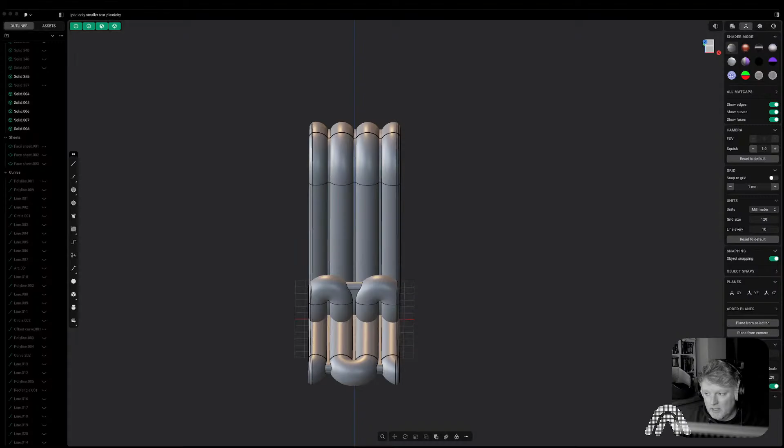So howdy folks, let's have a little look at what we did yesterday, Tuesday, because we designed an iPad stand, which you'll notice is quite different to what we actually designed. Well, not totally different - I made some modifications because ultimately the tests were fine. It actually came out pretty good. It was bigger than I thought it was going to be, but I think I actually quite like it.

My idea about putting a slice through the middle just to connect all these pipes together had to be done, but I've made it a lot thicker. If you imagine when it's printing on this side here, if there isn't this straight surface, there's actually quite a strong overhang on this curve. So I just made the slice that goes right through the middle much thicker, so now you have these flat surfaces, which mean it prints at a better angle.

Rather than the overhang - imagine this curve continued all the way to here, which is where it did go - you've now got much less of an overhang. So this version is actually printing at the moment. I think it'll be fine.

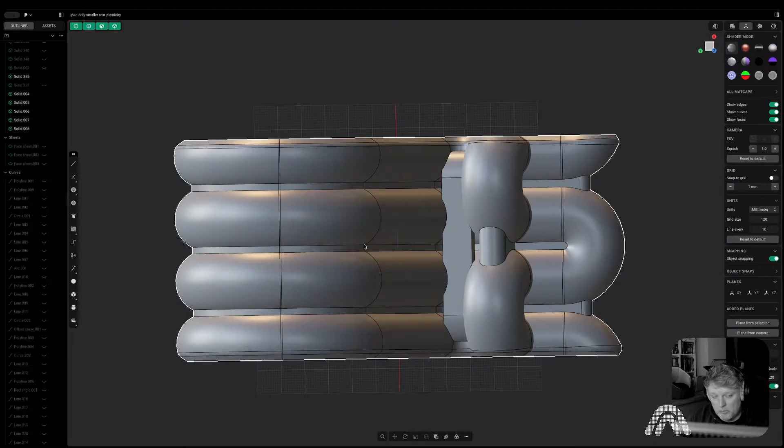I made it much narrower. It didn't need to be as wide as it was. But let's actually just have a little look at the...

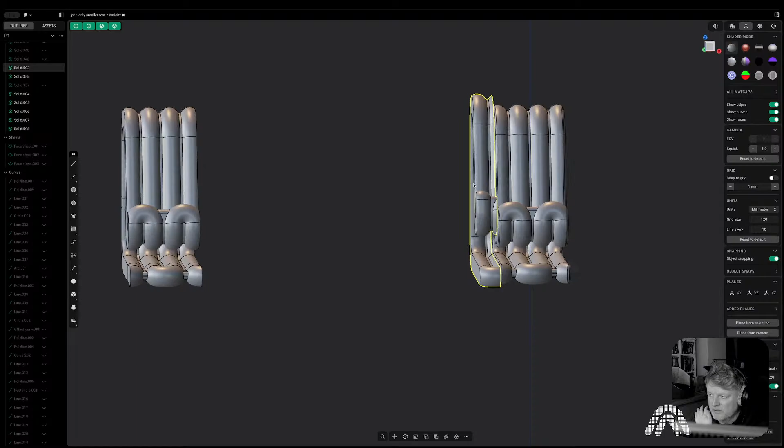I mean, say for example there was the additional width it was on, and the height - so it's quite a bit smaller. But it definitely is not needed.

Especially considering I'm using it on a 13-inch iPad Pro, so if you think about putting a normal iPad on, which is a bit smaller again, and then even if people put an iPad mini on, it would look even more ridiculous.

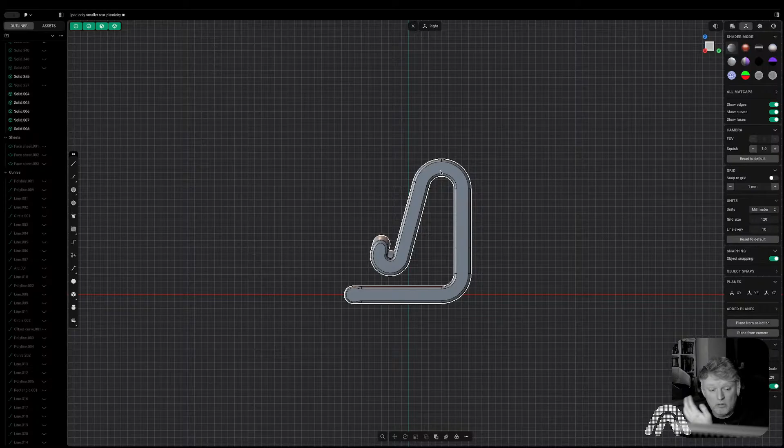It just looks totally not imbalanced physically, but it looks imbalanced as a design. I think really the ideal thing would be if you were to have - obviously the whole product has this 15-degree angle, which is what the iPad sits at and what everything's tied to effectively. I think the ideal place for that front to finish would be if we were to take that.

Just say for the sake of argument, that's 15 degrees.

I think really the front of this could end in there, just to give it a much better aspect, like several of those 15-degree lines which make the design. To be fair, that'd be really easy to do. Simple as just putting that in and then bringing it back. It's 2 parts there because I've halved it. But I might try that and give it a test, just see what I think.

But for today, now this is a weird idea. It's not weird, it's a lamp. I want to design a lamp today, which is something I do a lot.

And the bit that, when I say it's weird, the bit I think is weird is I find heat sinks very, like heat sinks on CPUs and any sort of cooling heat sink, I find them very aesthetically pleasing. I find them dense because there's obviously a lot of surface material in them, surface area, sorry. I think that heavily finned design I always really, really like. I've actually designed some bowls in the past which have been inspired by heat sinks.

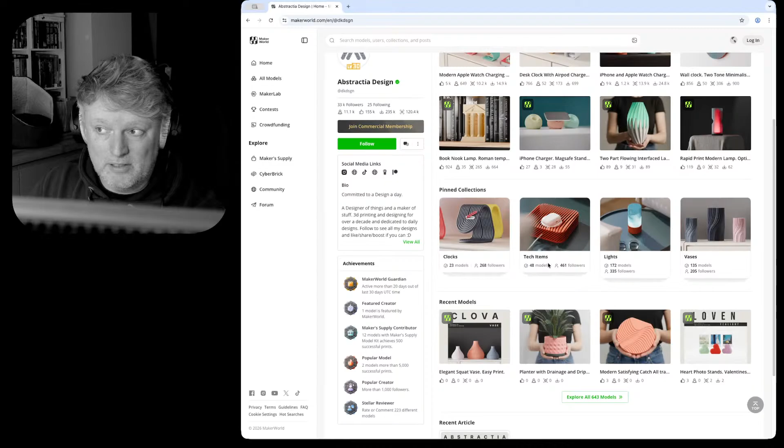I think, well, actually, you know what, let's have a little look at that bowl I'm talking about, because it's interesting. Now finding it might be another thing, because I did just notice today, I actually think I've got to... I don't know why it only says 640, oh, because some are hidden, because I've not uploaded them yet, well, I've not made them live yet. Do I have? I don't think I do. Let me just go to all my models and search by bowl.

I've never actually tried MakerWorld's search feature. Yeah, bowl, not bowls, bowl. Try heatsink. I don't know how anybody else is meant to find it if I can't find it. I'm 99% sure that I actually did call it bowl. But no, I'll have to find it later.

But yeah, I've always liked the heatsink kind of aesthetic. Which sounds like a bizarre sentence to say, a heatsink aesthetic, but I designed this lamp here. And I think the heatsink that this made me think of, which being a lamp is especially relevant, is...

You know, you get those when you used to have halogen lights, which you would have in your bathroom or something like that, and now they're banned. So now we have these LED ones, and quite often on the back of the LED ones they have these crazy heat sinks, and I assume the halogen ones did too, because obviously they were hotter.

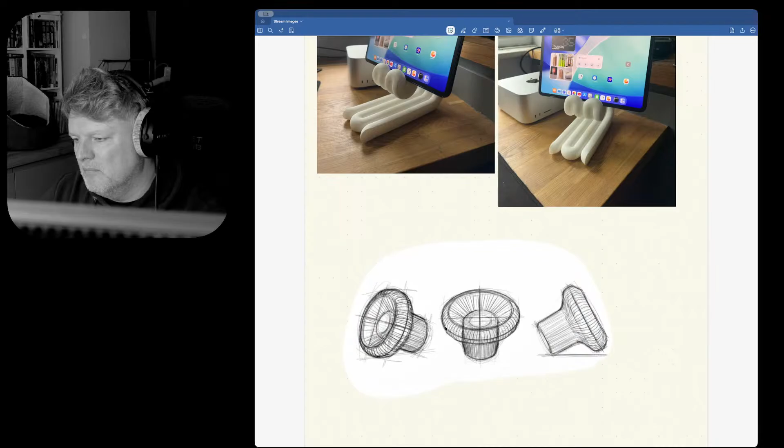And that was kind of what I was thinking of here. So if you imagine this line here was cut off and that this was the front of an LED light which goes in your ceiling, all this being fins, each of these being radial fins. And then in here having the LED mounted.

Now, what I'm not fully decided on yet is what I would want to do for the diffusion. Would I want fins for that, or would I just want something that dropped in, or would I actually just want it open like this so it shows all the fins, and then a small diffuser goes over here on the cap? I think that probably would be what I would want to do, because it would show off the fins more.

And then this is how I want the lamp to stand. It's not going to be a vertical lamp, it's going to rest on its side like this, so the cable would come out of this area here. Now, hopefully with the fins, I won't have to put any little legs on to stop it rolling, but if I do, it's not a massive problem. You could put little legs on, or actually just print a little tiny V-shaped stand, which would then just slot into the fins. So I think that's what I want to do today.

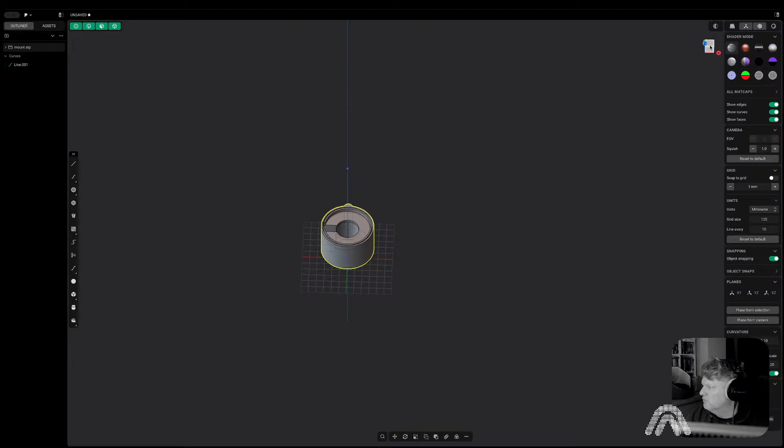So, mount - whereas this, straight to the point, mount. Now, a really annoying thing about this mount is because I have this little arc which is used to key it to lampshades when they sit on top, so I know the pattern on the lampshade matches the pattern on the base - some big brain galaxy thinking there.

But the problem is I've done this a few times and not realised, so this is a little top tip for you. You look at this, it's been imported, it's on the centre. You think when you're going to rotate it, it's central, but it's not, because by default when you go to rotate, it takes the centre of mass, not the arbitrary centre you think it should be as a human being, surprisingly. You can see, because there's extra volume here, the centre point's actually off.

So if you go to rotate it 90 degrees, all of a sudden it's no longer centred. A few times I've designed stuff and not noticed that. And the thing is, when I've gone and done the lampshade, everything fits because obviously everything's designed together, but I'm like, why is the LED not in the middle?

And that's been why. So the first thing I do when I bring in this mount is I set the pivot point with V to the centre of where it's imported. I do find it odd that it imports central - it must have just been in that position when I saved it as an STP file. It's odd to me that it knows to put it centrally on import, but then not. But these are the mysteries. Tip: if you've got something that you think isn't fully symmetrical, just double-check your pivot point when you are centering.

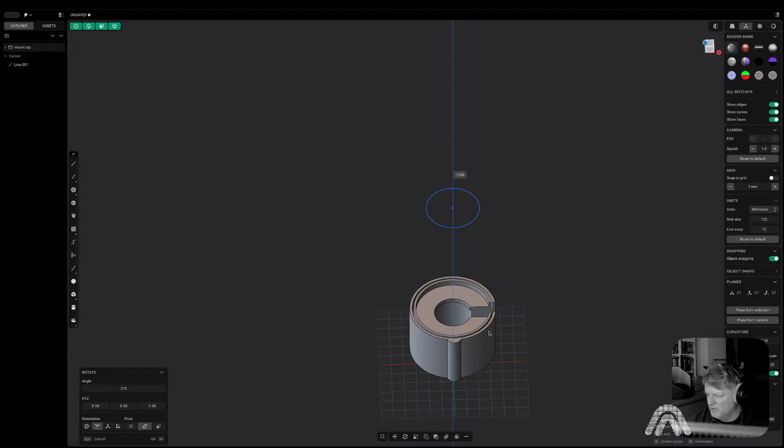So I think I'm going to design this top down. I don't know why, I just think my brain prefers thinking of things vertically when I'm designing them, even though this is going to actually lie horizontally - well, kind of horizontally.

Right, so I'm not even really going to use that right now, but the reason I brought that in is it gives you a good idea of scale. Now, another thing is I'm just going to add in a circle that is 240 wide. That's not necessarily full size, I mean I think we will need that full size - that's just so I know what size I don't want to go over for the build plate.

Because again, if you design it too big and then you have to shrink it down, you get into that thin fins problem. So I'm going to go with 240 wide. Now, ideally 180, because then it would fit in the A1 Mini, but I just think this item is going to need to be bigger to have the impact you want it to have.

I could make a smaller version if it's a popular design - in fact, we'll see what it looks like when it's done. I think initially let's just go for a 25mm straight edge here.

What I'm going to do is just design the profile, make it into a fin, and then radial array the fin. But this is always a bit that I think just needs lots of finagling. Oh hurt, didn't expect to be saying finagling today.

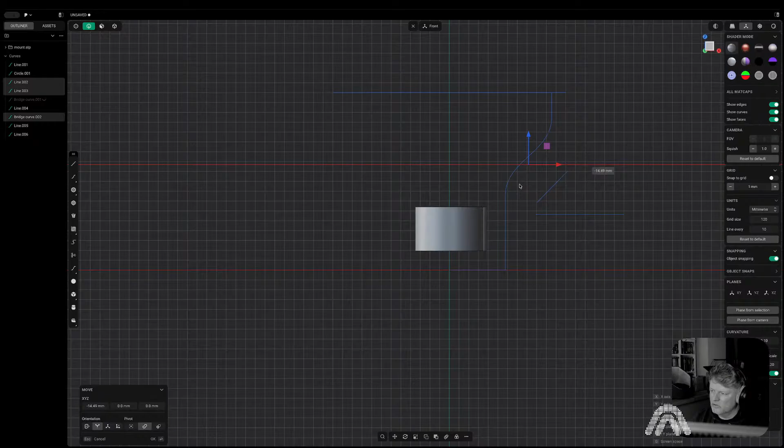Now the light's not going to go here, the light's going to be further up.

First stream sneeze. Achievement unlocked. Right. I hope you all said bless you, otherwise I'll be smited by Satan for the rest of my days.

So let's make this into a fin. Now 3.6, and I've pressed tab to do it both directions. Let's try 2mm, so that'll make a 4mm fin. What do I think about that as a thin fin?

I think the easiest way to know whether I like it is just to radial it, and we'll just see how we feel.

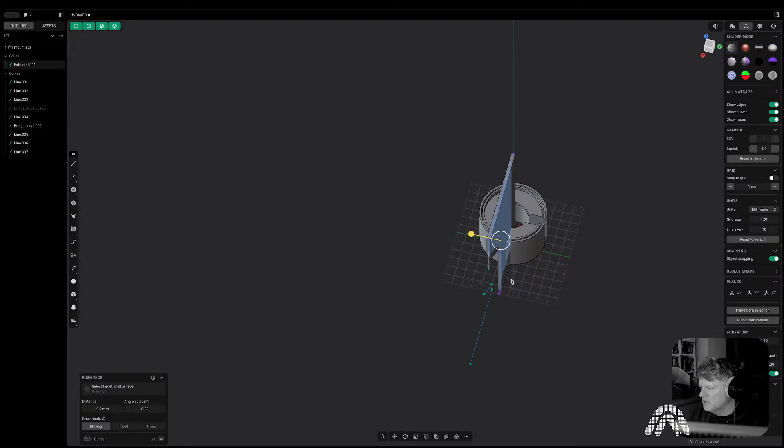I feel that looks a little thick, but it could also be that there's not a fillet on the edge. Just what I'm going to do is I'm going to take half a mil off. Sounds like nothing, but both sides it's a mil.

And before doing the radial array, I'll add a fillet because otherwise I'll have to do it 300 times.

Now, let's have a little look at what we think of this as an array.

Now, how many do I want? Now, I want it to be an even number. Quite like that. Let's go with that.

So that was 50, because I can guarantee you in about 15 seconds I'm going to say I need to change the fin and I'll delete them all. So remember, stream, remember 50.

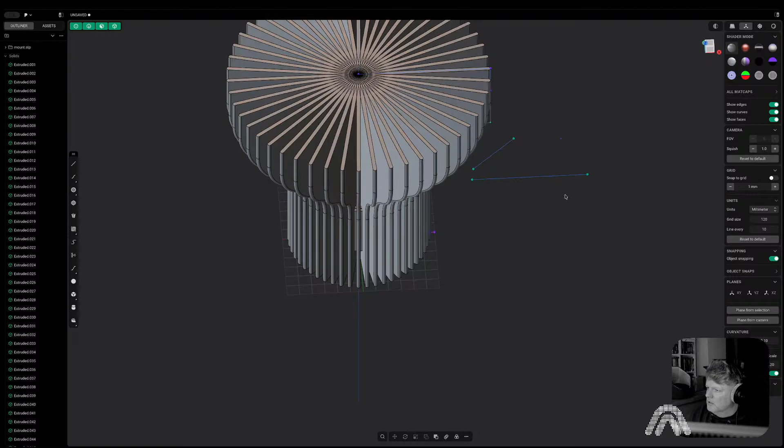So what volume do I want? Yeah, so I'm actually going to delete these fins. Let's delete all those fins, because what we could do with is figuring and just getting this internal shape here sorted.

So what I'm going to do is I'm just going to take those curves we did, join them, offset them, might offset them a bit more.

So what I'm being careful about here is I don't want to make these two smaller fins as well, like in actual center to circumference of the circle that they're making up.

Because I will have to put braces as they go up, because tall thin bits as they print start doing this. And I don't know if you can tell, but it's not ideal for 3D printing this sort of motion.

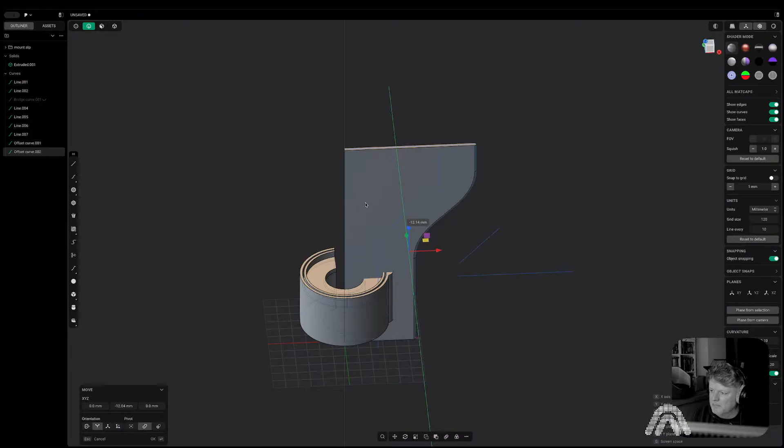So yeah, I'm gonna have to make them rigid to each other. And the best way to do that is just effectively add some bracing inside.

Let's just bring this up to where I think I'd want it. I'd probably want it about here. Now, obviously, what I'm going to do is I'm going to integrate it into the fins.

I think what I'll then do is I will put a line here.

Let's turn off X-ray now. I absolutely hate X-ray and I don't know why. I think it's just busy.

Right, well, that was precisely not what I wanted. So let's just get all of these. Scale Z, scale Y, because on Y, not Z. And then let's grab on the Y and bring them to this line.

Yeah, and then that gives us a solid. And basically, I just wanted to make a little bit more at the top here.

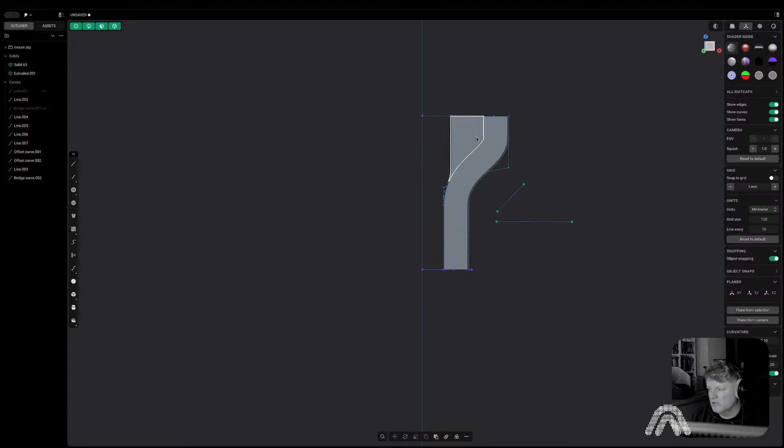Which I'm not going to include right now. I'm just going to hide that just to see how I feel about it when it looks revolved. Not revolved. A rotated array. A radial array, sorry.

Yeah, I like it. So are these contacting in any place? They're not, which is good. That's good. But what I'm going to do is I'm going to add in a circle here.

Going to come all the way out to here. I'm just going to pull this up a few mil. What did we say the other one? It was 4 in the end, wasn't it? So we'll do 4.

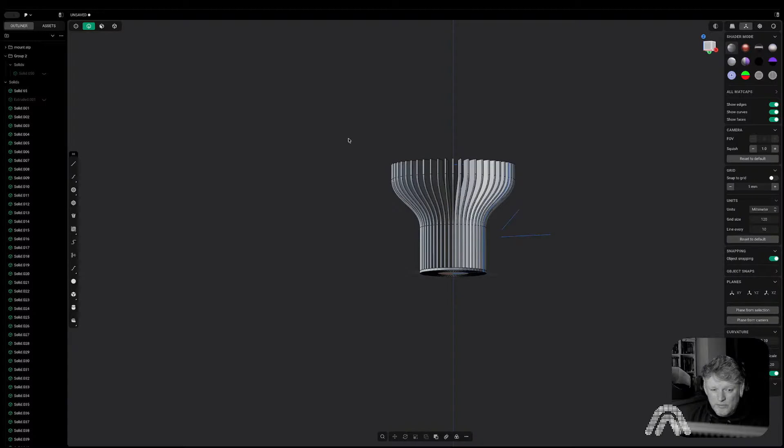Right, let me get that first fin. I'm going to duplicate it and put it in a group, just so if I decide I want to do something different with them, I've got the original fin.

And then add all these curves. So that would be the basic gist of it. Now I'm gonna have to put at least another 2 braces in.

So I think I'll put one there and possibly one here. This one should actually just be the same as the one I did before, so I can just use this same circle. So if we go up.

Now, in an ideal world, I wouldn't have to add these because I think they do detract a little bit from the aesthetic, but can't do anything about it. It won't. It just won't print.

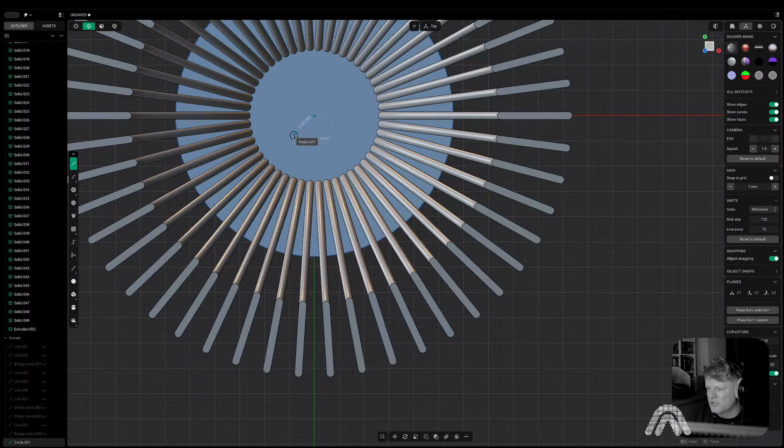What I could have done is a couple more fins, and then they would have actually contacted slightly, so then this would have been a solid surface. But I quite like the idea of these tiny little gaps.

So I'm just going to keep it this way. I'll just do another circle in here that comes to there. Yeah, so now I've got a donut rather than a ring like I have at the bottom.

Just checking everything's working still, because I'm getting some weirdly dropped frames today. I think it's our internet's on a bit of a jank today.

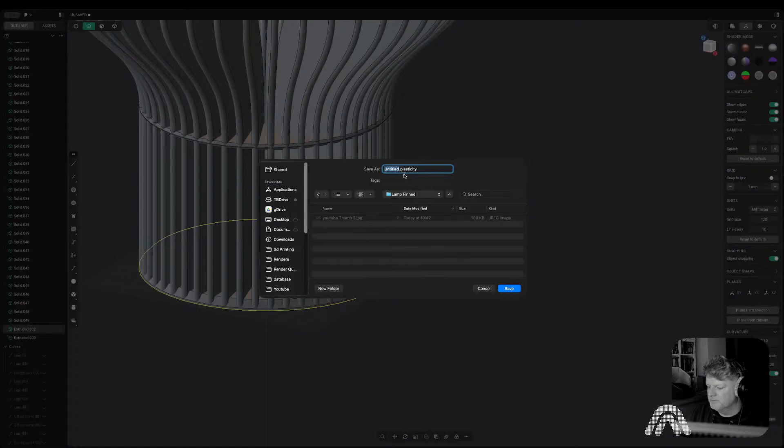Let's save this. Lamp finned. Lamp finned.

So let me have a little look at my sketch again. So I think what we want is the mount to be... let's put a sectional analysis on so we can see clearly. I think we probably want the mount about here.

And if I put it about there, then it's recessed in enough. And what I'm thinking is I could chop across here like that and chop those bits off at the top there.

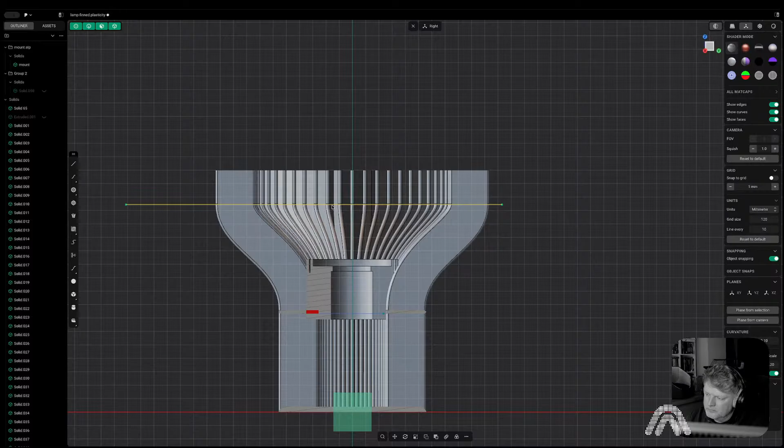Now, not necessarily to get rid of them, but what I'm thinking is I could then print a separate part that acted as like a top. I don't really know if I want to do that or not. I think a cooler idea would be... first of all, do I actually like that extra bit at the top?

What I'm going to do is I'm just going to actually do the cut. I always say this, but sometimes you just have to do things literally just to delete the idea from your head.

Well, I do anyway, because I just let ideas run away with me. So this might look bad, but it doesn't really matter, does it? We just press undo. So let's just hide those for a second.

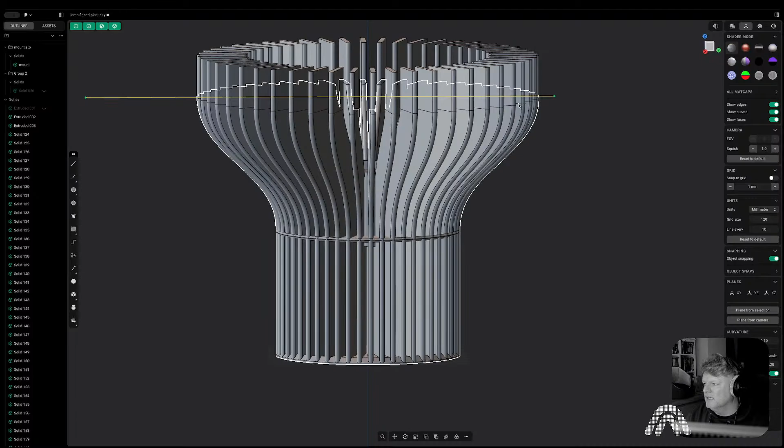Yeah, so straight away, no, it's better with them on. But I think what it is, I don't like the angle of them. So, you know what? Rather than deleting them, I'm going to delete all but one.

And then we can maybe have a little look to see what we think about doing with this shape. So what I think would be better... this is why I'm going to wish I didn't have fillets.

Everybody always says do fillets last. Do fillets last. Don't do fillets until the very last thing. Do I listen? No. So...

I'm trying to think about what sort of form I want this. So essentially what I don't like is this super flat top and this box. It just looks like exactly what it is, which is a square stuck on the top. So...

Should I try a circle? Just thinking of shapes. Like cut like that. Let me have a look at my... Ah, right.

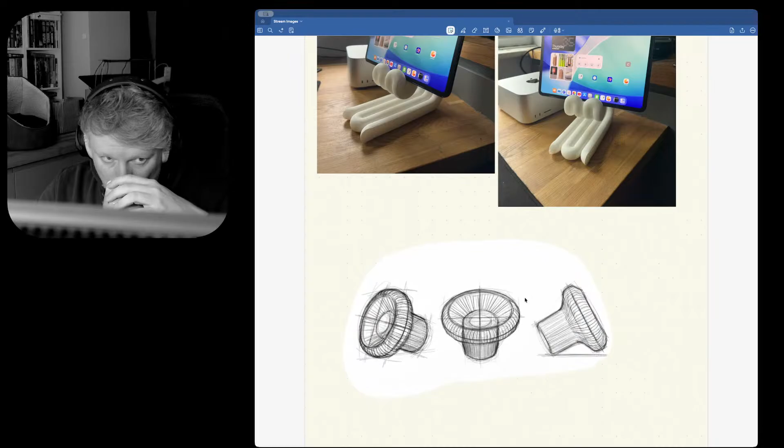Right, so what I did when I do this is curve on the outside straight down to where the light is on the inside, which I remember seeing on the examples I looked at for lights. So, right, let's just take that straight edge here as it's fine.

But what we want is to effectively fillet off this, and then we can use... probably we could go half the height actually, probably chop this in half.

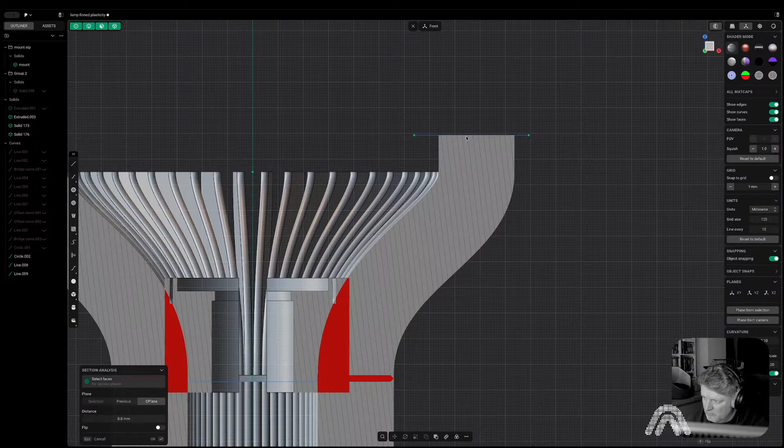So let me get a section analysis on so it's easier to see. I'm thinking if we fillet this off so it's curved, maybe about there, and then we make a straight section of the fin here so it's not the same on the inside as the outside.

This is one of those things that looks right on the sketch, but then I'm not convinced it's the right approach. So I'm just going to do an ISO on there so I can steal this line, so I've got something to bridge from. So if I was to do like this.

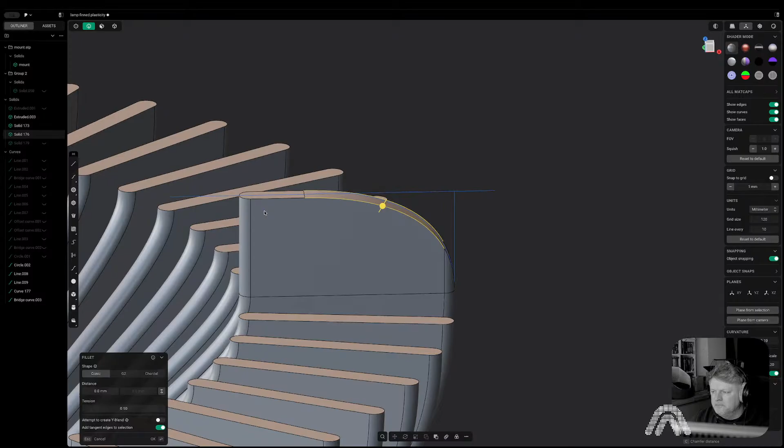I want that on the inside. I think I do prefer that. I definitely prefer that. Let's just do the array and see what we think when there's lots of them. Yeah, I definitely prefer it, but I think I do need to do something about this fillet.

Don't add tangent edges. Yeah, that's what I want. Let's get rid of these curves. .5. Yeah. Now, am I actually happy with this internal here, or do I want... Let me just put a line in here.

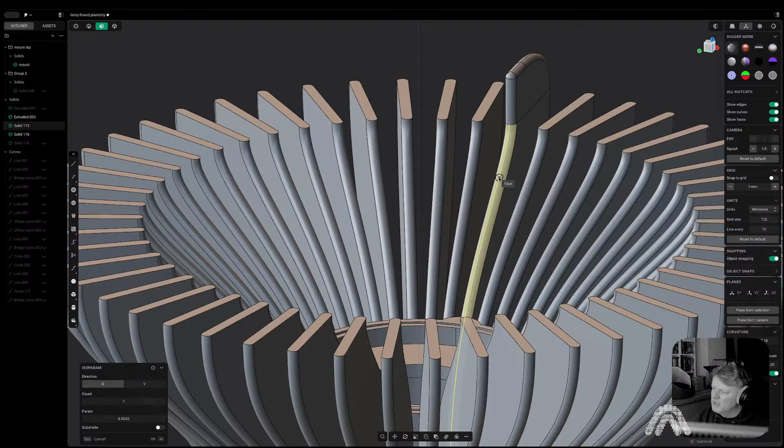So what I'm thinking is, I still don't like this bit here. So if I was to put a line like that to give us this angle, let's just try and bridge in a curve there to see what sort of stuff we get.

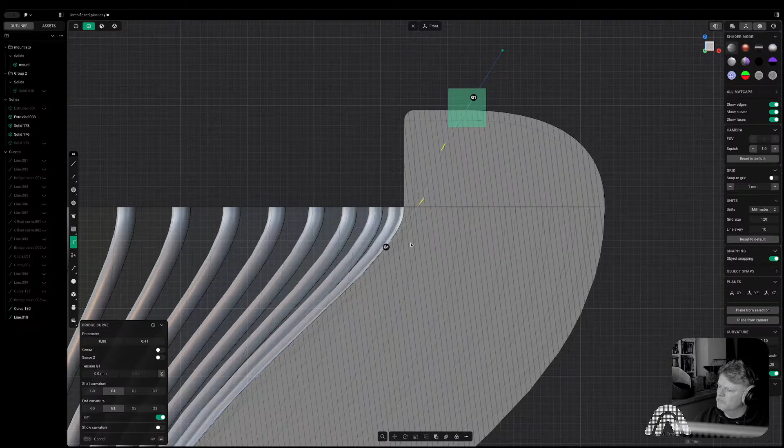Think about this, I don't want it that far. I want it to chop. Obviously we'd have to cut this as well. I don't know what I think.

It's definitely better than the straight. So let's just get that line back again. This here, and then cut. Yeah, we're not going to be able to, are we? Do this though.

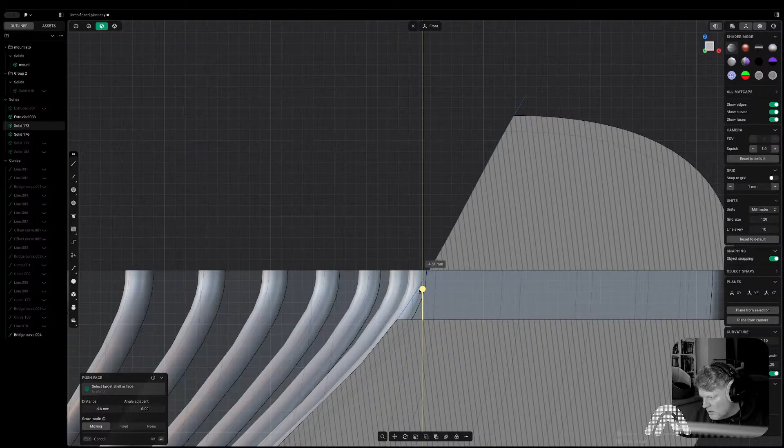So effectively what's done there is it pulled it, and because it's smart and it knows the curves that it's running, it effectively just goes with the angle of the curve that's on its face, which is this here.

So can we... Yeah. 1.5, was it? Yeah. So now will these meet? I don't think they will. I think ultimately...

Oh, they do meet. Nah, not right though, not perfect. Yeah, not at the back. I think the better way to do this might be actually to just hide this.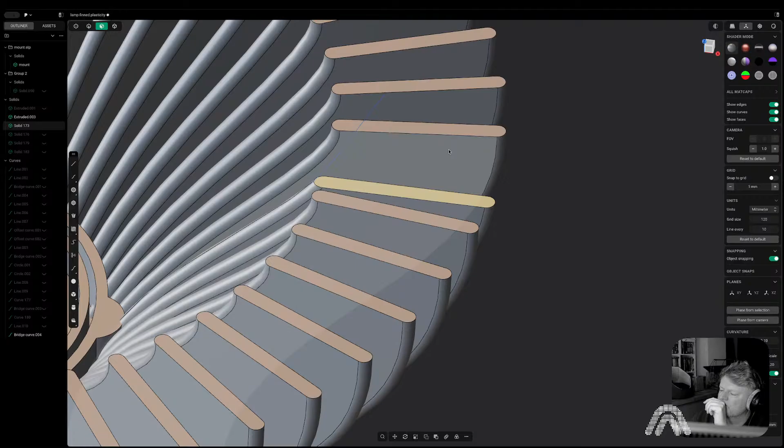And make it like a surface model, but I'm not sure if this will work. So all I'm really doing here is making a smaller version of the same geometry. Oh, it's not joined, that's right.

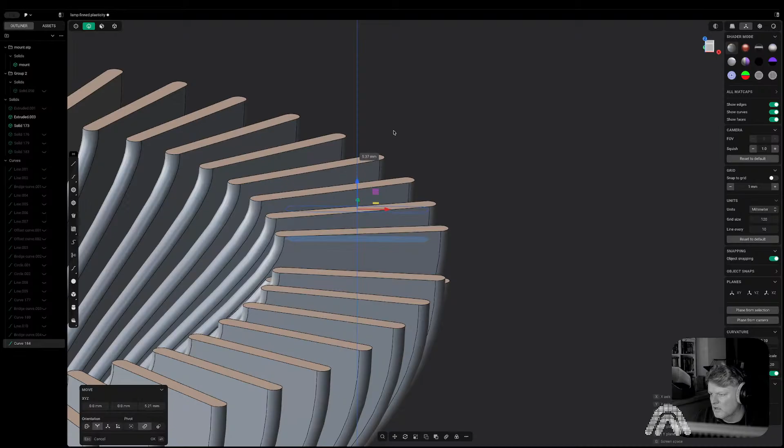Just thinking of making a smaller version of the geometry that we can then loft into and just see what it looks like. So if we get rid of this surface here, so this is now a sheet. Let's add a surface so the tangency's got something to calculate off. Right. Yeah, we need G1.

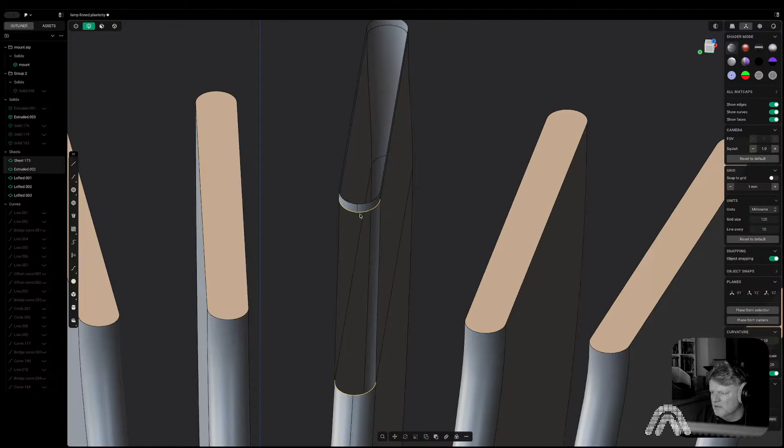Let's get on these here. Got a bit of a funny kink in there, haven't we? I think it's that middle line. Can I get rid of them? I don't think I can, because I think that's effectively where the fillet meets in the middle. Yeah.

I'm not sure it's any better than what... I mean, I would chop the top off and then make it a dome across there, but let's just try one more time with it. Let's just actually try purely.

Let's bridge those curves and see if we give it a guide, whether it's any better. Yeah, I think it is, isn't it?

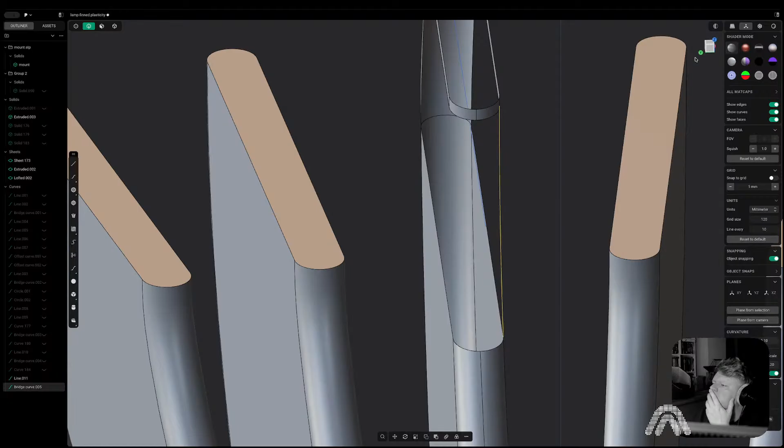Yeah, let's try this then. I might as well bridge this as well, just to give it another guide. I think I'll leave those G1. So now at least this way, this surface here has got, it's like fully defined, it's got surfaces to connect to everywhere.

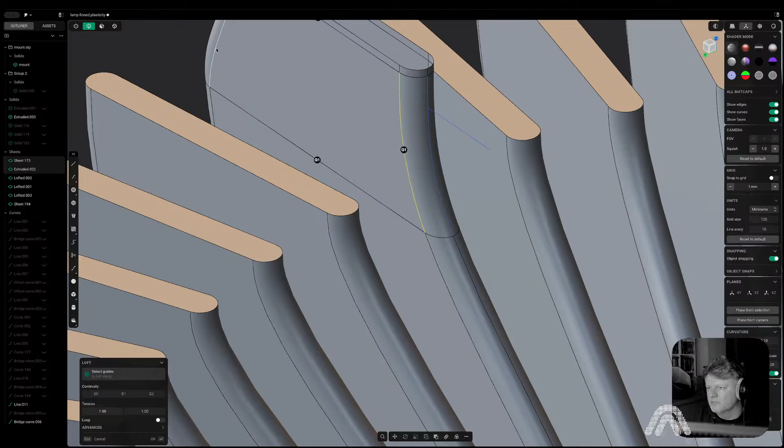Just making you dizzy because it made me dizzy. I don't know why.

Right, well these join. For some reason I don't feel like these are going to join. They joined. And they joined to the main body. So let's just get rid of this bit again.

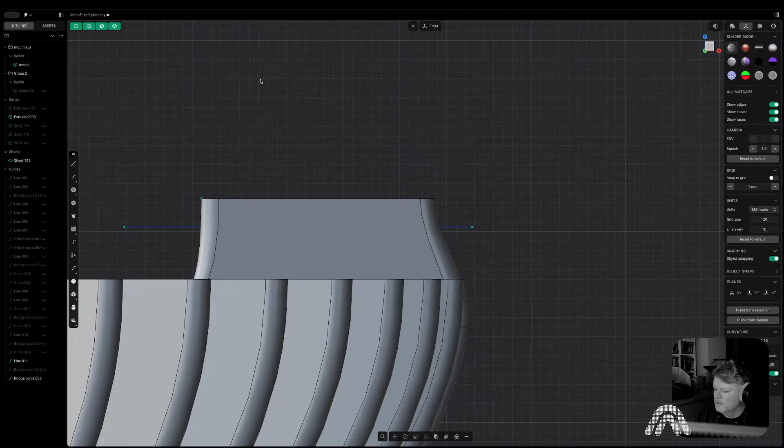Now I'm going to take this line here and bridge it to this one. There is not one there, because you need to add it. So bridge from here to here.

Now, this is going to be a cut line. My thoughts are, if I find an angle or a line that I quite like... oh, this is a bad idea. Yeah, it's a bad idea. Just out of interest, if we loft that to there.

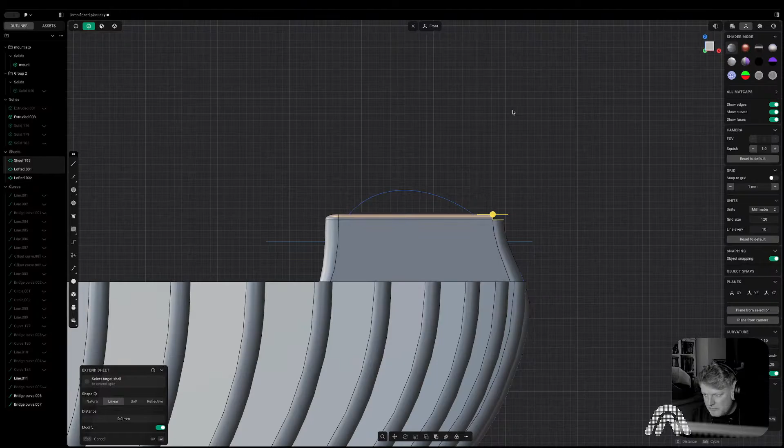I don't think I like this. Do you know what I think it is? I think it takes away from that heatsink look. It's more, I think it's a bit better when it's straight. Yeah, I think I'm going to get rid of this.

You know what? This is just me experimenting now, because I can get this model in 5 minutes, but I'm kind of interested about what this is going to do.

Let's bring that to the end and that to the end.

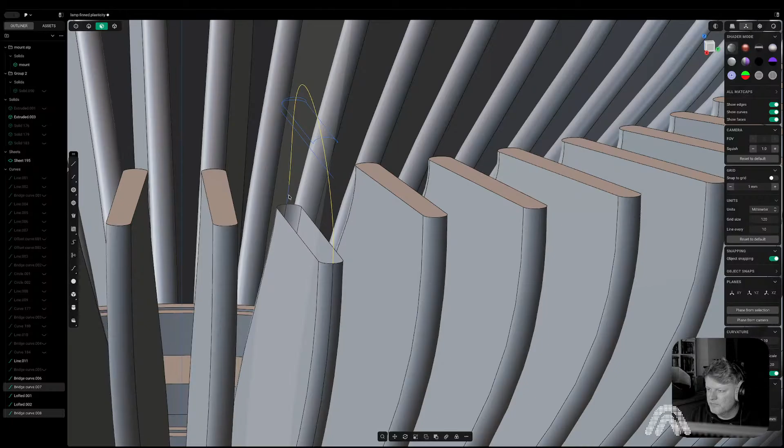So I think I've got X, yeah, so I've got the studio edition, so I've got X NURBS. So this is not going to work. But I never use X NURBS, and X NURBS is basically like a really advanced thing for surfacing. I was just wondering if I could give it that guide and it would figure out what I meant. It doesn't, but I think you could probably loft.

If you could do this. No, you couldn't, it's too aggressive. Yeah, intersects that way.

Where's that bit I cut off?

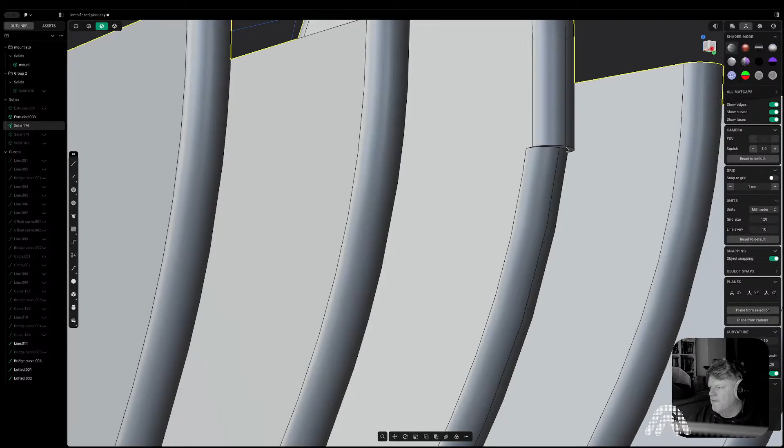Sometimes the simplest solution is just the best one.

Right, so rather than have to redo every fin, let's just cut this top off and radial it. Because I think all the rest will be the same, or will they not be because I made that change? No, they're not. Right, we'll have to do the fin then. That's not really a problem, is it?

Hide this. So what's the best way to do this?

So if we treat that as the middle of the fin and we radial array, it's still on 50. So if we change it to 100, yeah, now we've got the ability to cut this, and then this.

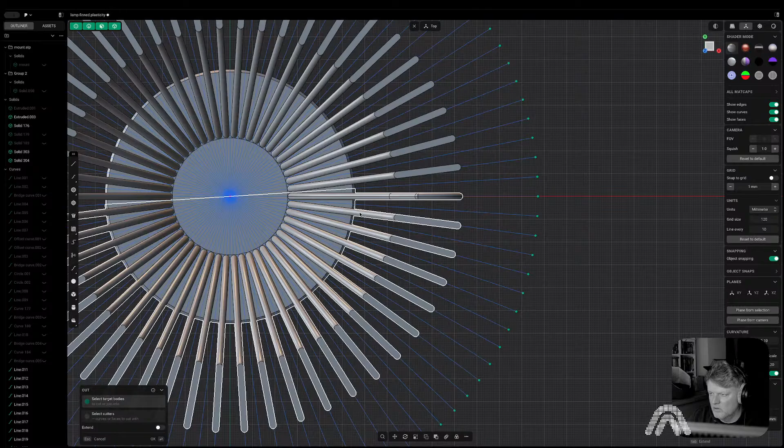And then all of this can be hidden. And then I believe we can just do this 50 and we'll be back to where we started. 100 looks cool and all, doesn't it?

Oh wow, I should not have done that. I didn't realise I was just trying to boolean 50 bodies at once there, which on my new computer worked a treat, but whew, God, that would have made things explode on my old one, which was not even well, it was a bloody brilliant computer, but let's get rid of all these lines.

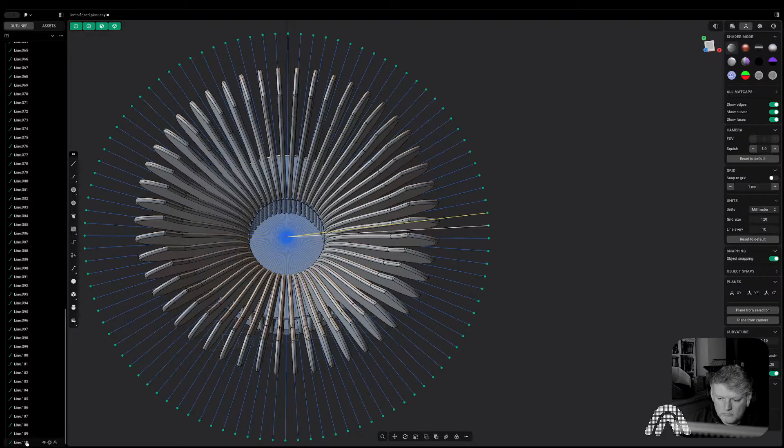So let me just rotate this just to have a little look at what I think when it's sat down. Oh, I like it. I like it a lot. Yeah. Wicked. What's this bit here?

Oh, it's where I cut the cut it before. I'd also cut this. We're back in one.

So let's get my mount. Now, how am I feeling about where the mount's going to go? Do I definitely want it that position? I think I do.

And the good thing about the mount being here as well is it's more contact area, so there's even less space, less height where it's unsupported left to right, the fin. So really the only it's going to be from here upwards, which I think should be fine.

I'm notoriously bad at guessing this though, which is why I go through 4,000 tons of printed filament a year.

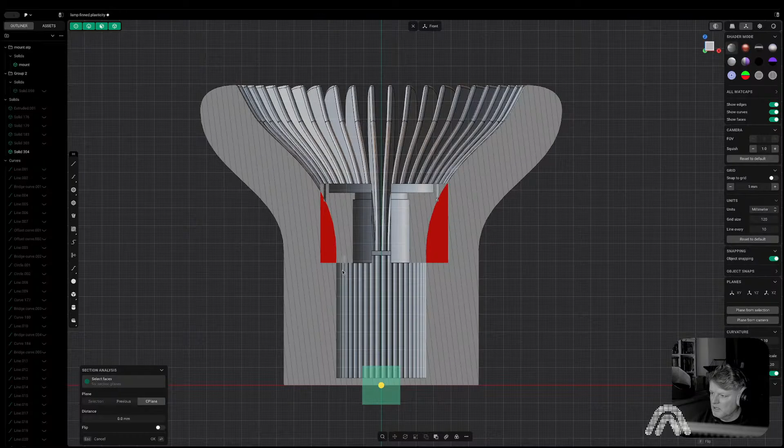Right, well, if we're going to do this, we can't have that. Can't have that overhang there. So let's do this.

So now when it's printing upwards, there isn't an overhang. Now this lip here is for E14 bulbs, but this is going to use the LED. So I think what I'll do is I'll print a cap that goes on here that acts as a diffuser.

So we don't actually need that little nodule on here. There's another word that's going to be fun to see what the auto captions on YouTube say.

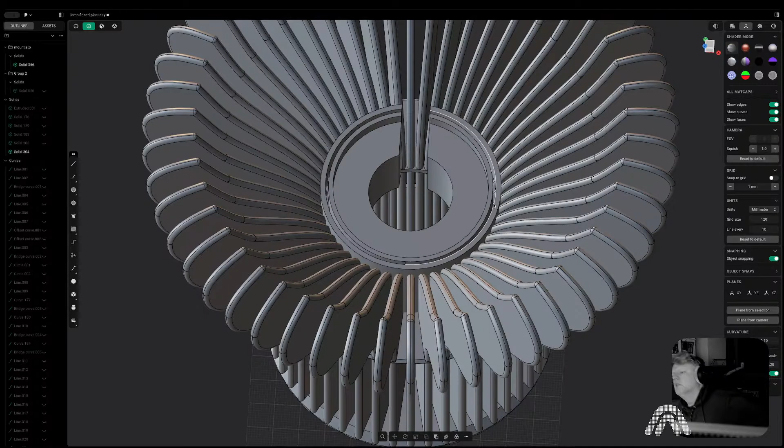So on the mount, this slot here is what I have designed for diffusers. So we'll be able to use that on this design. And I think there'll be enough.

Well, that's a good question, David. That's a good question. So what I'm thinking is that obviously it's going to sit in here and the cable comes like this, doesn't it?

Now, generally, let me look at this on the side. So the cable would come down here. It might be worth chopping a little bit out this fin, just so there's a bit more clearance for the cable to run down.

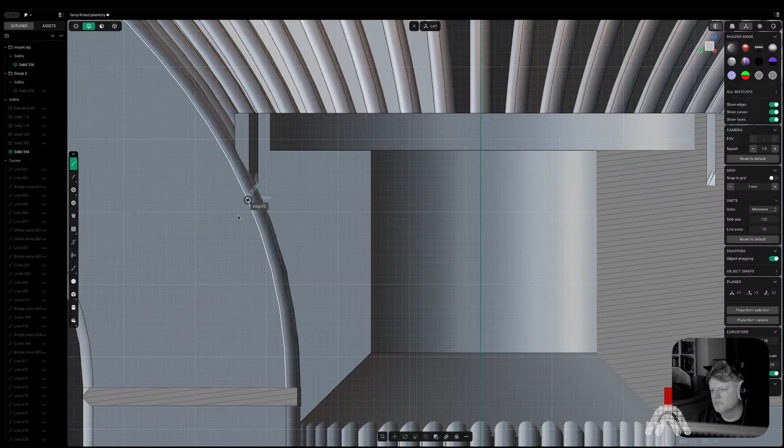But I'm not going to do that in case I don't have to. I think what might be a good idea actually is to just, yeah, let's just do a little bit like bring the circle up to here. Let's bring it up to the top so you can see.

And just extrude a little bit out. Now, it's technically doing that everywhere, but everywhere else is where the mount is, so it doesn't really matter. But there, it just means there's a bit more room for the cable to come down.

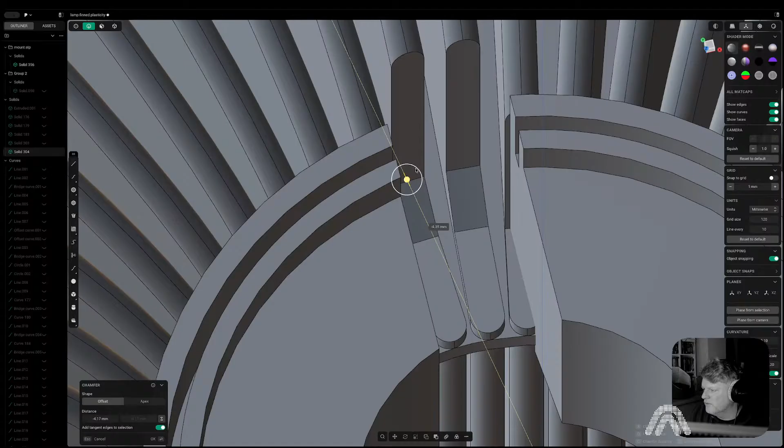And I can probably also just push these ones out a little bit. Yeah, that's a good idea. It just means that if you think the cable has to bend over, it needs a little bit of space to do so. And I'll just fillet them in a bit so they're not as sharp.

It might actually, because they're now going to have less connection, I'm actually going to take the time to just put in a little brace across them, because they'll be more prone to wobbling.

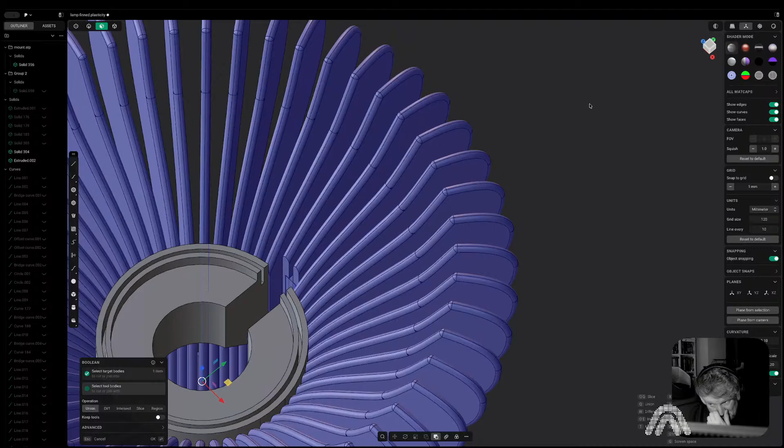These little things, when you're designing like lamps especially, you think oh it's pretty simple design, and it is a pretty simple design, but there's always just these little things. And I mean that's the difference between designing stuff for a render and designing stuff for a print. If it's going to be an actual product, then it has to work.

I don't need that anyway. So what we now need is a hole for the wire to come out the bottom. So I think it's here. It's where we'd want it.

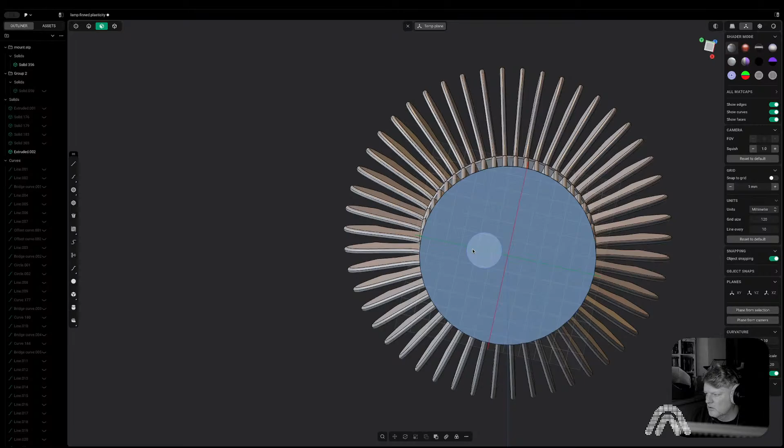Of course, we need it more in the middle, don't we? Because we've got all those fins. Yeah, that's the right side. I wanted the hole to be on the same side as where the wire comes down, but it'll need to be big enough for the switch, the little button, and I think that's big enough.

I don't think we'll need to add legs because we went with an even number of fins. They'll be able to rest there.

So I think that's pretty good. I actually quite like it now with that. I think it was actually worth spending the time just to mess about backwards and forwards to get this curve here. Because that was the original - that was the original, sorry. Yeah, I definitely prefer that.

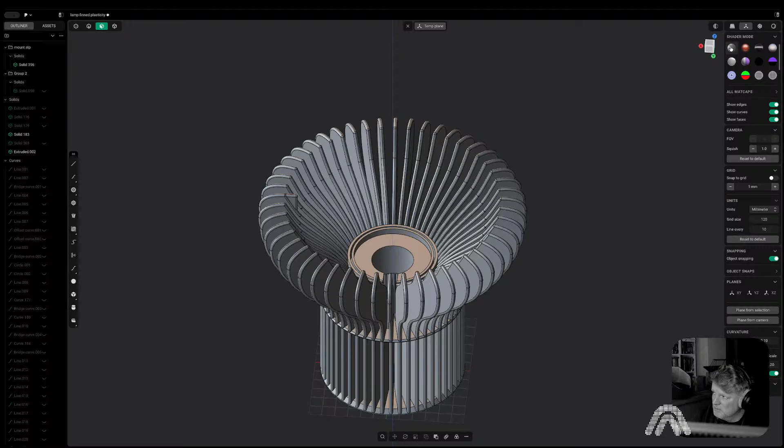I have to say, it's one of the things about streaming 3D modeling is I do like to be open with the little struggles, the bits where you're just like, I don't really know how to get that. Not that I don't know how to get it, but more that I don't know if this is going to be worth it. And especially when you start to understand the software, you sit there and think, right, I know there's maybe 20 steps to do this, and you're looking at it thinking, I'm not sure this is going to be worth it.

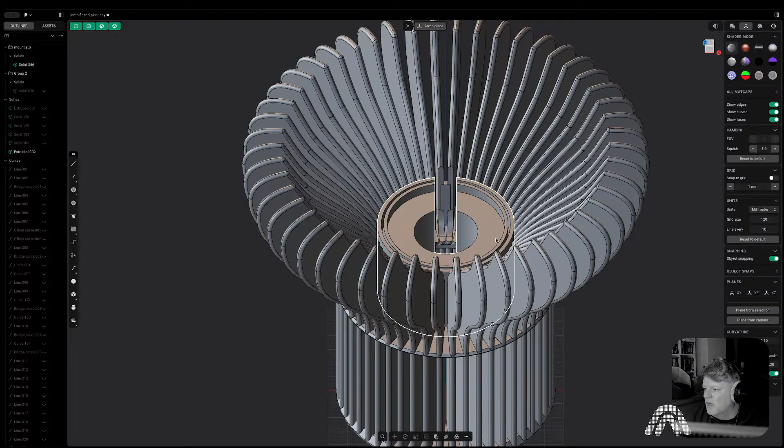And the backtracking that occurs from that. And I think a lot of 3D modeling channels - not that there aren't some fantastic ones, and no way is this to be taken as me slating people who do 3D modeling on YouTube, because that is the way I learned - quite a lot of them are edited videos that I see anyway. Maybe rather than the pure live stream, because we live in an age of brain rot where constant 15-second dopamine hits are the only way people are engaged. And I'd love to say that me sitting squinting at the screen, moving a fillet to 6mm, is going to hit the dopamine tap for everybody that it hits for me, but that isn't the truth.

So a lot of content for 3D modeling is edited, cut heavily, and I'm doing that as well myself. I am taking all these live streams and starting to edit them down to more snappy 20-minute things. But it's good to do them like this, where you can just say, you know what, I went down a path and that path wasn't the path to go down, so I turned around. Because we just live in this era where we think perfection is just there and you just take it, but it's not, and it requires an awful lot of just backwards and forwards and backwards and forwards.

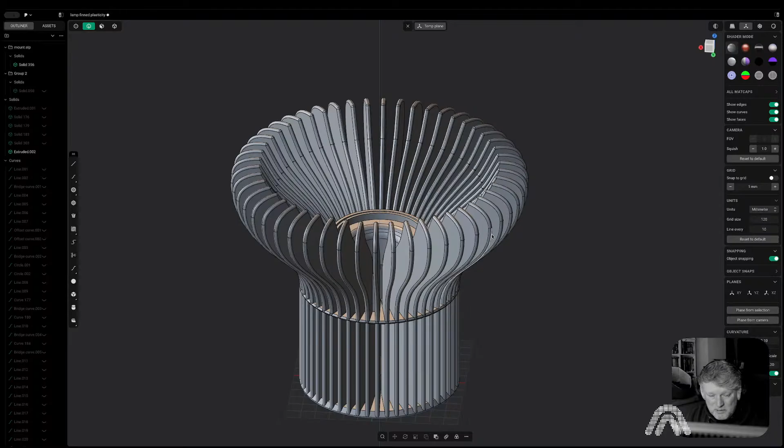People will look at my MakerWorld account and go, oh wow, what a great designer, he does all these things, but there's loads of failures in there as well, and loads of things that never make it up there. And there will be loads of streams I do in the future where I get to the end and go, this is crap and I don't want to use it. And that in itself has value. Well, I think it does anyway. And I hope people do find that it has value.

But I think we'll make a diffuser now, rather than me just rambling on about the brain rot of the human race. As if I'm not part of the human race and I don't have incredible levels of brain rot, which I do.

I think one of the reasons 3D modeling and 3D design stuck with me was it is very satisfying. There's this element of...

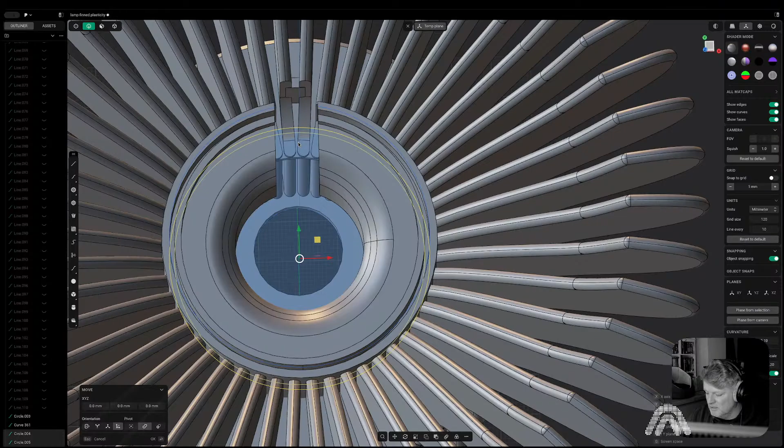Did you hear a cat sneezing in the background there? Yeah, just here underneath my finger, there's a cat in bed. I've previously locked him out of streams because he's a chatty little devil, but today I thought you're going to have to be in here at some point since he sleeps in here every day. So he's in here, any minute now he could be up. Prepare yourself for the black cat - it's not just that the stream's black and white, he is actually a black cat. Nobody in the world will give an absolute toss that my cat is behind me getting ready to get up, but God, I love the little sausage to bits.

So I'm just making a little slot-in diffuser here. Now I will cut a chunk out of it there so the cable can run.

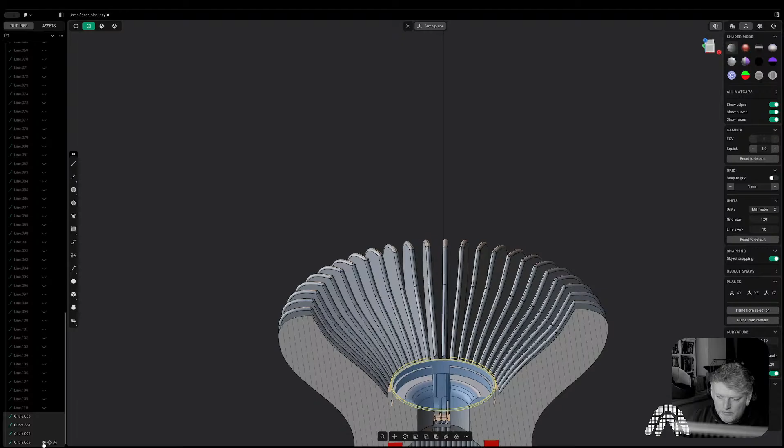Yeah, what was I saying? I think part of the reason that 3D modeling works for me, and it's something I've stuck at for as long as I have, as somebody who's not very good at sticking at things - it's just when you're designing, it's a million little hits of wow, that was cool, that worked, wow, that works, oh I've got an idea, I'll execute it, or I'll have a go at it. It never really feels the same.

I think that's why I said on the stream the other day when I did the book nook, I was glad it was done, because that was 8 hours, 4 streams, plus all the rest I did off stream. So I was really ready for it to be done. And that's no slight on it as a thing, it's just I like new, I like having ideas and executing on ideas.

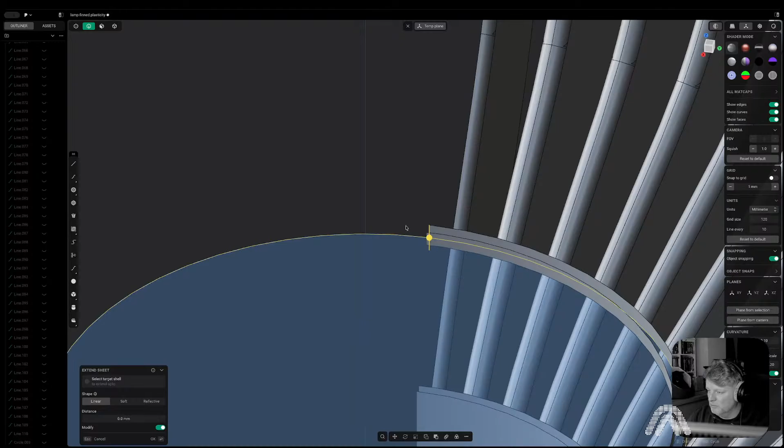This morning I literally didn't have any idea what I was going to do on the stream, and that's fine. That would panic a lot of people. I'm a bit weird like that, stuff like that doesn't panic me. I just think there's a million things rocking around in that head. It'll come.

Do you know what would be a better idea? I'm trying to peek through the castle - what are they called, the bits of the castle? I want to say castle funyuns, but it's not funyuns - crenellations. Trying to peep through the crenellations here. Just get rid of it, idiot.

So yeah, I'm just making a bulb-looking diffuser here, using a simple loft. It's not going to be a full bulb shape because it's not a full dome, but I just want a bit of a taper to it. That means I can bring it away from the light a little bit.

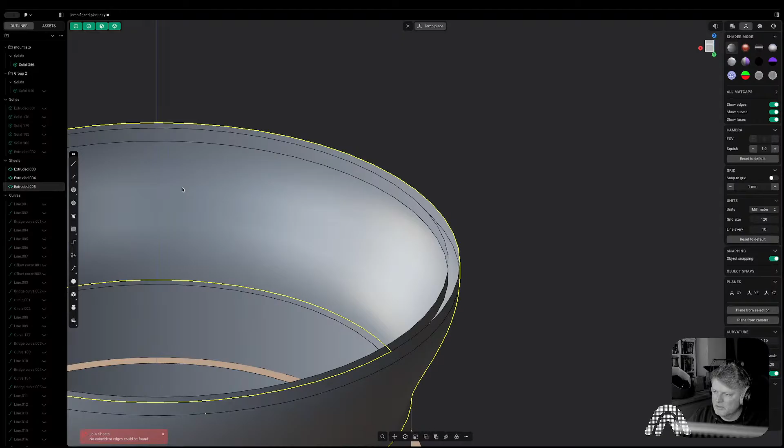Join. Join. Oh, they're already joined, that's right. Is that just extra I get? I have to admit, I do sometimes. Right, I've not lofted it, that's why.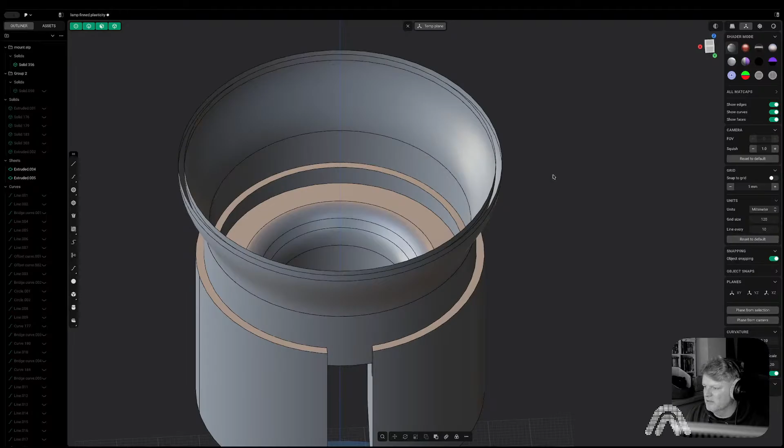Sometimes I find that the grey in Plasticity can be a little bit visually difficult, but I've tried the other ones as well - I think it's just more of a me thing. Because obviously you can change things to be like this one, which is really good for checking normals and stuff. But as a Newcastle United fan, obviously I'm a huge fan of the zebra analysis, otherwise known as the barcode analysis, otherwise known as the Bruno Guimaraes analysis.

So that's all one. So what just happens if I just loft - face has succeeded, but a face-to-face inconsistency has been produced. What a fun error.

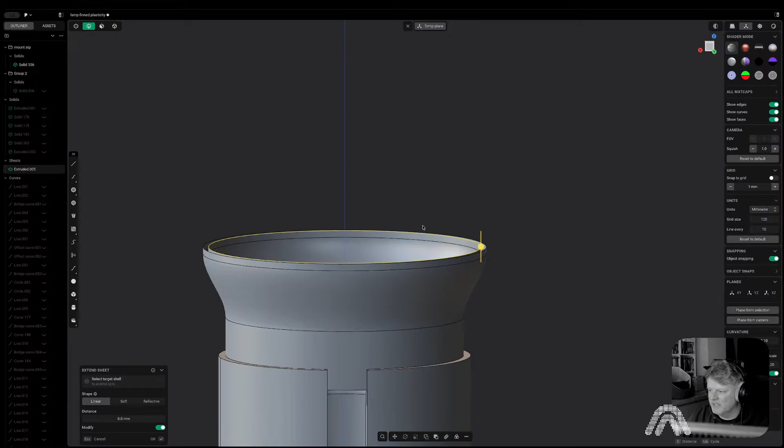Don't want that. Don't want that. I think I just want to bring this up, and I don't even really think I want much of it to be much bigger. Just let's Shift J that, just to make it a surface. Yeah, that's kind of what I was thinking of. Still a bit more. I don't know why I hold my breath.

Do you know what I should have done? I should have just made this a solid rather than doing all this bloody surface modelling. I should have just made it a solid and then made it fit. Why have I made it so complicated for myself? Just make it a solid and run a hollow command on it.

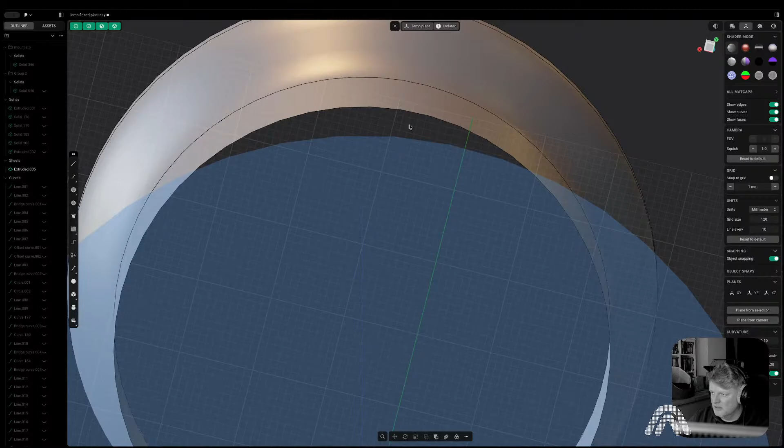I think I do actually want that, but just cut. Yeah, I think that's more what I'm thinking of. Yeah, that's exactly what I was thinking of. Promise.

So, hollow, hollow, hollow. Let's just do -1. That's a diffuser.

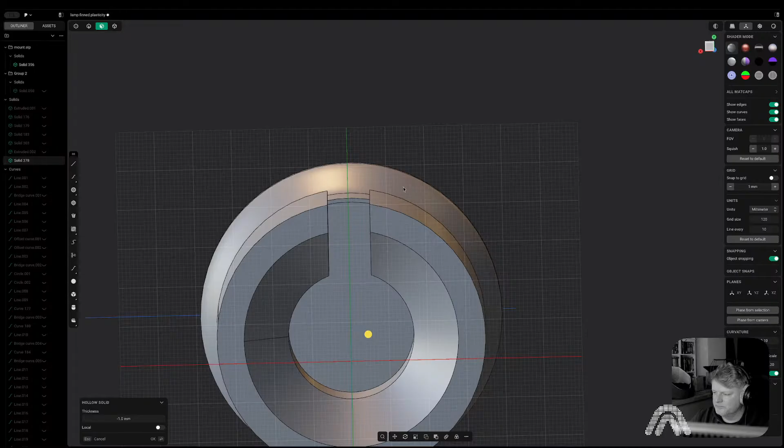Let me add in a section analysis just so I can have a little check. I'm not getting any... nah, there's no interference there, is there? Yeah, we could actually add a bit back in. Let's just make it a tiny bit thicker. It's not done all the way around. It has. Right.

This is where I bring the body in and go, I flipping hate it. I flipping hate it. I do as well. Oh, I've made it far too big.

Yeah, I want it like... you muppet. Yeah, that's far too big. I want it to be like... let's say... about there. So I'll have to redesign it.

Thankfully, software good, me bad.

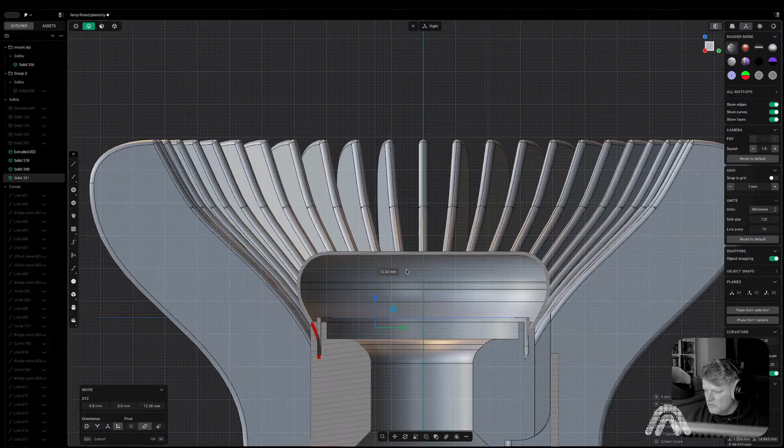So, with a fair wind and a great attitude, of which I certainly don't have a great attitude, I might just be able to loft these two things together, and then the job will be a good one.

That little tease has gone back to sleep. I thought he was going to come and say hello.

Actually, just going to go straight. Now, that's not necessarily the best aesthetic, but you won't really see this bit. The reason I'm doing that is it's better for the overhang, because attempting to make a G1 or G2 tangent connection means it has to have a steep initial bit. Now this will print this way, so I might end up changing these fillets at the top too, because they're a bit aggressive, aren't they? Well, they're not a bit aggressive, they're a bit not going to print.

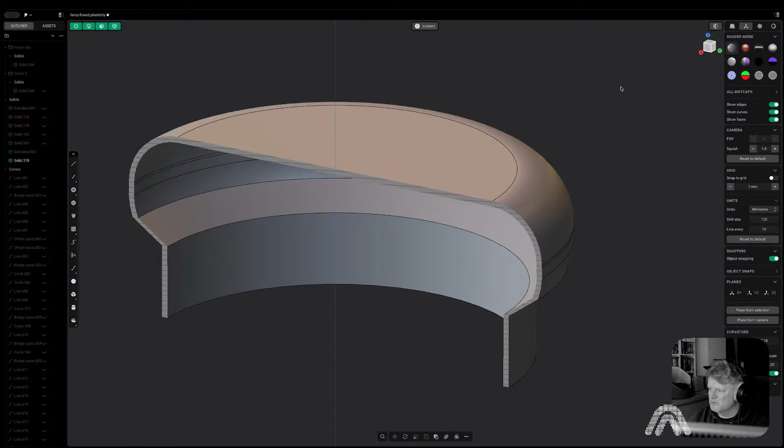Don't you love Plasticity? Like, that is just flipping marvellous. How cheeky do I feel like being here?

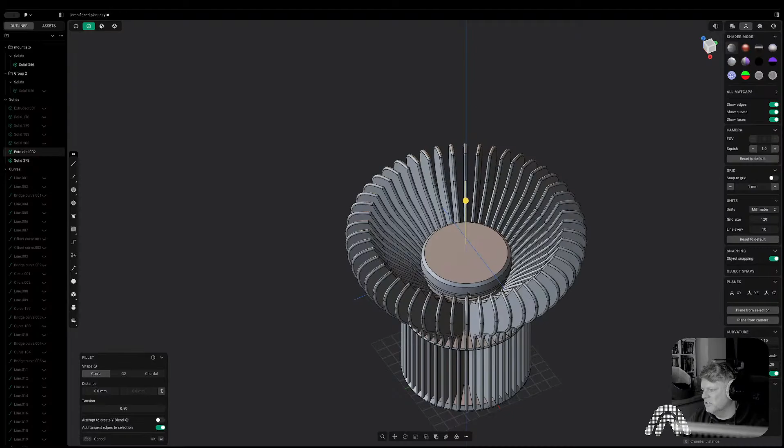Yeah, that should be okay. I think it is. I think I could actually just do the whole thing being lower. Whoa. Whoa.

To be fair, I haven't actually plugged in. Oh, I have, haven't I? Oh no, I haven't. The mount's still there.

So if I select the mount and select the diffuser, you notice I haven't named anything today after my... God, sometimes I look tiny in this camera. I'm 6'5". No, I'm going to leave it where it is.

Doing that thing where I'm overthinking. Because actually, if I was to just bring it this even further in... yeah, I'll achieve that by simply chopping the bottom of those fins off so they don't intersect.

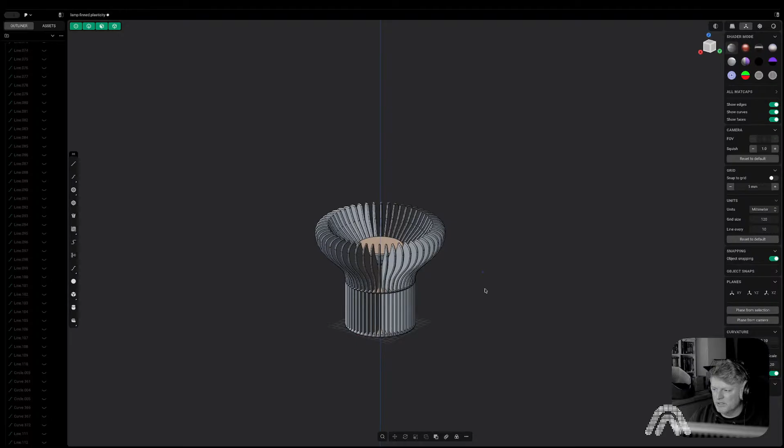I do have great fears this is going to be like a day print, because you find with fin stuff, you use a lot more material than you think, because it's all solid almost. There's not really a lot of room for infill in here, so the slicer just goes, oh, just do it all edges.

So I bet that is going to, and do you know what, I'm actually going to have a little look while we're on stream here just to see. Let's just export it. I won't have Bambu slicer on the screen because it's not set up to do so, but bear with me if something explodes while I do this.

Right, what's your guess? It's not in yet, but I'm guessing it would help if it had the mount in. This could be like a really...

Like, some seriously nerdy, you know, there's that great website, Guess the Game - guess the screenshot, or what? No, Guess the Game, where you guess the screenshot, which I'm absolutely hideously good at. Genuinely upsets me how good I am at it. Considering I can't remember what day the bin is, but I can remember that 4-pixel square from that one shot is Metal Gear from the NES, which is a game I've never played, but somehow I know that is that.

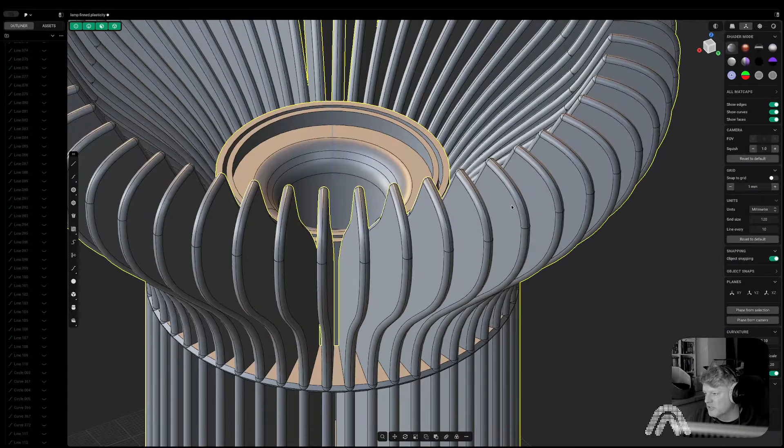I will set that as a test print away probably tomorrow. I'm going away at the weekend, so I won't be streaming tomorrow.

Which I'm excited to go away. I'm only going away for a couple of days, but a little bit disappointed because I don't like buggering up my schedule. I'm best when I stick to a schedule, but it is what it is.

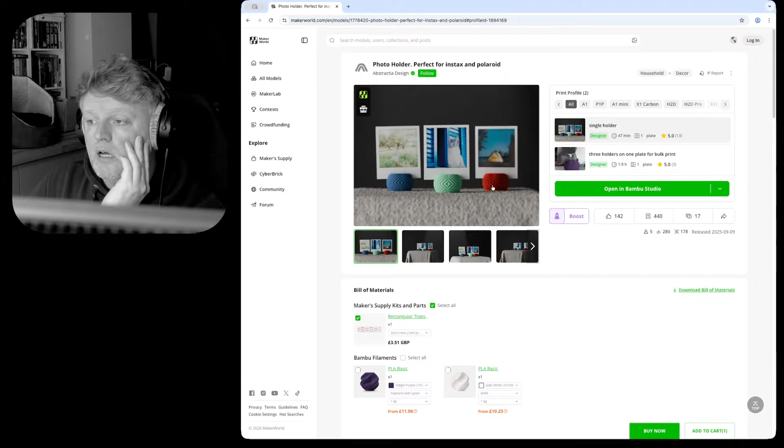There's all these lovely sumptuous models you can get your blips around. I'm just going to pick a random one, talk about, bang, Instax holders. These are really easy to design. Have been very popular, one of my most popular ones actually. I'm just thinking, I think I've got other Instax ones I've not got around to uploading, actually.

But anyway, little diamond ones, simple mirrored patterns in Plasticity. Probably took me about 25 minutes to design. I had to go through a couple of iterations of how thick so they hold the pictures properly, because the first one, the merest breeze would blow the photo out, which I think when you're designing a photo holder, one of the key aspects of it is that it holds the photo.

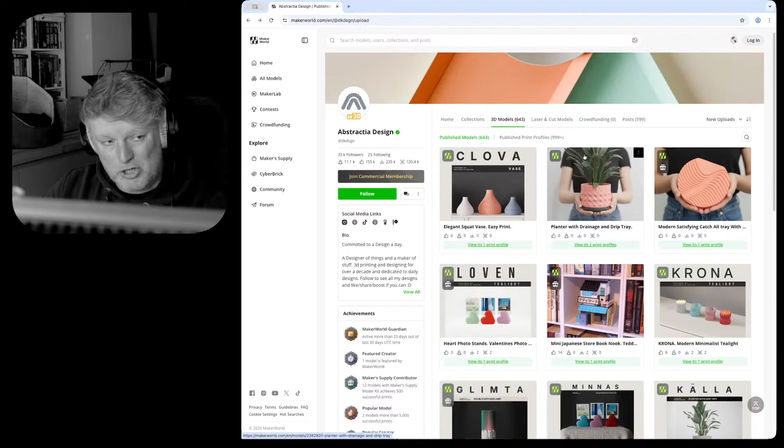And I'm going to work through the Book Nook. I'm going to try and do as much as possible, and where I think it works, do shorter episoded versions of live streams. So there's a little less of me sitting like that for 30 seconds at a time, and a little less of me squinting at the screen, and a little bit more just crash bang wallop. So you can look forward to that. Everybody loves a bit of crash bang wallop.